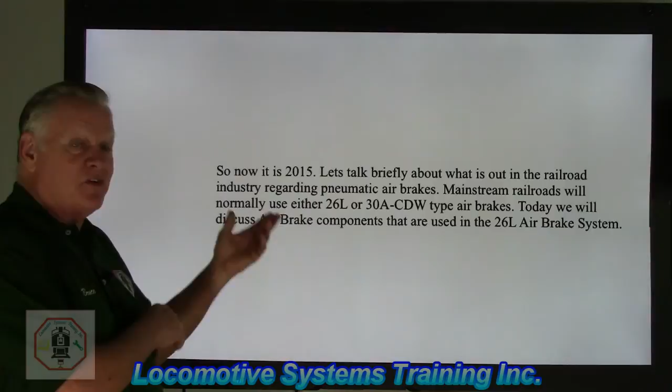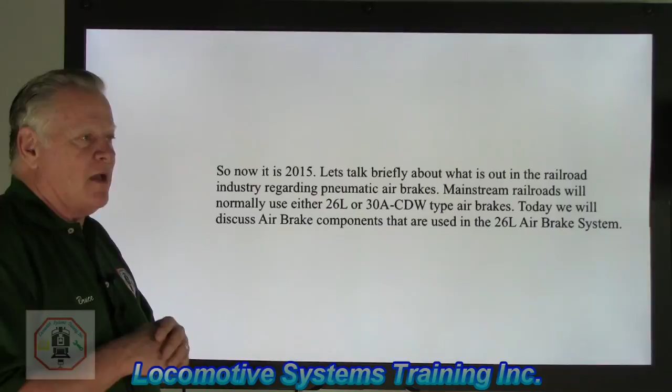Let's talk briefly about what is out in the railroad industry regarding pneumatic air brakes. From now on, we're just going to talk about pneumatic air brakes or air brakes. Mainstream railroads will normally use either 26L or 30A CDW type air brake systems. Those two systems are very, very similar. They pretty much operate the same except for a couple of pieces, which we'll probably get into a little bit later. Today we will discuss air brake components that are used in the 26L air brake system.

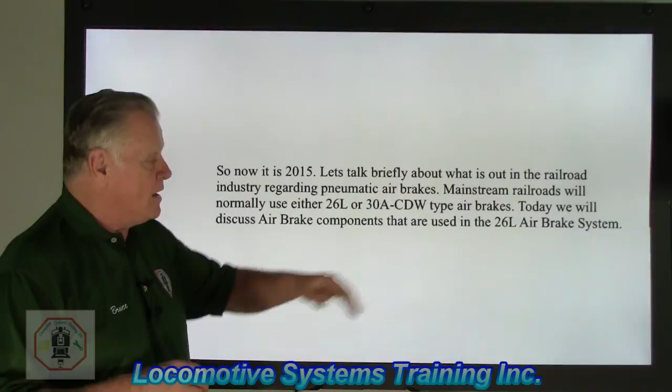Okay, so now we're going to talk about the 26C automatic brake valve. I'm the engineer and I'm sitting in the seat right here and I'm looking forward. I'm driving down the tracks. I got a 3-unit consist and 150 cars behind me. So I know, because I've driven this route before, that down the road there is Dead Man's Curve. So I got to slow down to go around Dead Man's Curve safely.

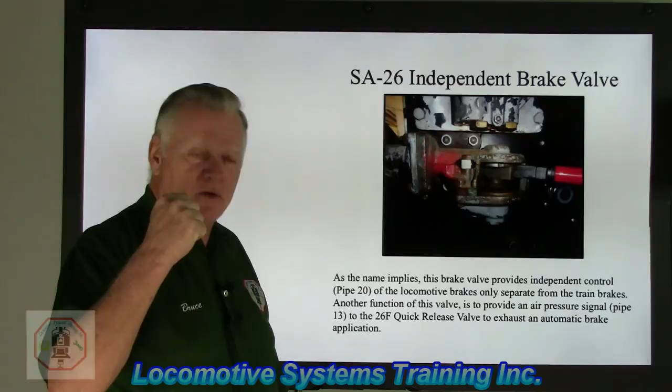Let's go back to the independent brake valve for just a second. Let's say I apply this from release all the way to full application. I'm pressurizing pipe 20. I'm going to fill the maximum of 45 psi, pounds per square inch. With that fully applied, now go back to the J relay valve.

It'll send an air signal, pipe 20, down to this valve. Main reservoir is located at the top of this valve. By the way, main reservoir is the granddaddy of all the air in the air brake system. It pumps in at 130 to 140 psi, the largest or highest pressure in the system. But pipe 20 is only 45 pounds.

So this input signal says: this guy wants full independent application. I'm going to put in an input of 45 on the upper diaphragm, 45 on the lower. I'm getting a little ahead of you here, but bear with me. 45 here, 45 here, output going out to the brake cylinder is going to be a total of 72 pounds. It's based on the percentage of the diaphragms in here.

And if you have questions, give me a call or send me an email and we'll give it more detail. Anyway, a non-multiplying J relay valve, if I put 45 pounds in, how much air am I going to get out to the brake cylinders?

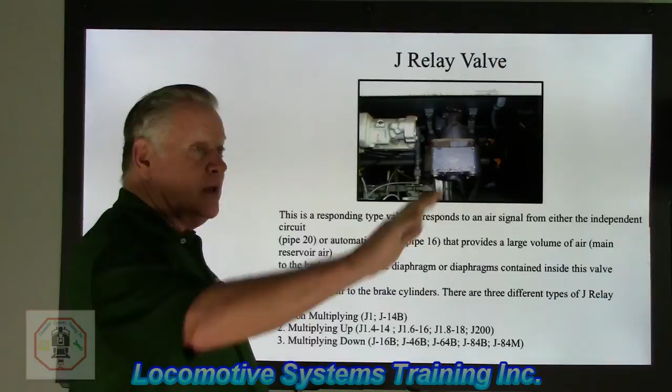Yep, 45 pounds. If I have a multiplying up valve like the J1.4-14, J1.6-16, J1.8-18, or a J200, any of those four, I would have had a 45 pound pressure. That pressure goes in, and the output is greater than the input. That's called a multiplying up valve.

Multiplying down valve: J16B, J46B, J64B, J84B, or J84M. You'll find this mostly on older locomotives retrofitted from cast iron brake shoes to low friction or high friction composition brake shoes. Because those shoes are so effective at braking, they actually had to knock the pressures down, otherwise they'd lock up the wheels. So the signal would go in at 45, and the output pressure would be something less than that. So: not multiplying, 45 in, 45 out. Multiplying up, 45 in, pressure greater. Multiplying down, 45 in, pressure less than 45 output.

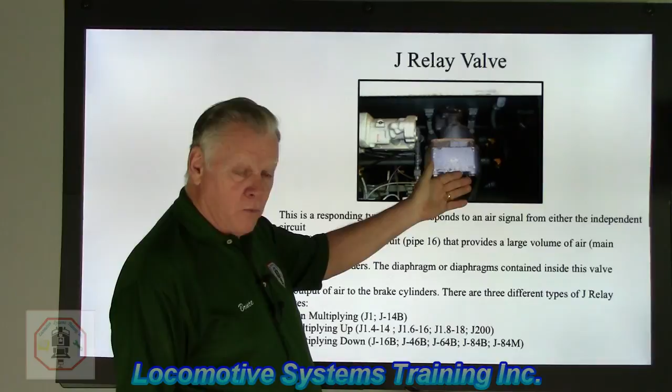There's a whole bunch of J relay valves. All this guy does is act as a responding valve, taking the signal from pipe 20 in the independent circuit or pipe 16 in the automatic circuit, and sending an output signal over to the brake cylinders. A lot of people think when you move that handle, in either the automatic brake or the independent brake, air actually goes down and fills the cylinders with air. That is not true. All that signal does is go from the automatic or independent valve to this guy, through a couple of check valves and other little things. And this guy, based on what handle I moved and what circuit I'm in, will send the output to the brake cylinder.

Let's go to the next one. I need to go back all the way to the automatic brake valve. The 26C automatic brake valve is an initiating valve.

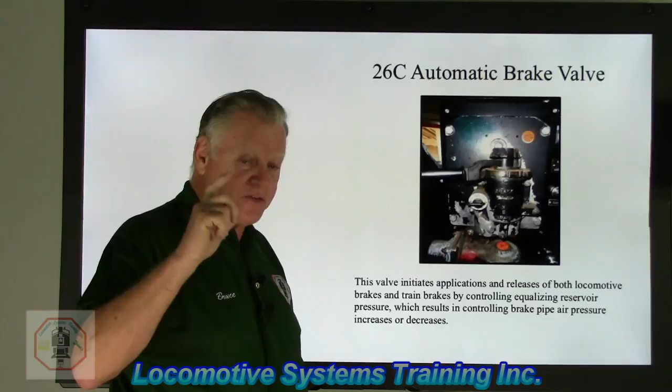We've already discussed that when I take the automatic brake valve and move the handle into the service zone, I'm reducing equalizing reservoir pressure and brake pipe pressure. I want to create a pipe 16 signal pressure. Now let's go back to where we were. That reduction in brake pipe is felt inside this valve and also in this side valve. So let me explain what they are.

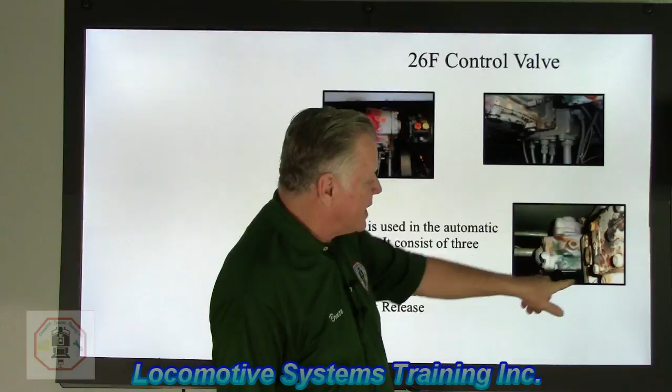This here is the 26F service portion. This right here is the pipe bracket—see all the pipes coming up and bolting to the bottom of it. And the little guy on the side here is called the 26F quick release valve. There are three components in the 26F control valve: the pipe bracket, service portion, and quick release valve.

This guy responds to that handle movement in the cab. I'm not going to go into the whole process, because then you're talking intermediate air brakes, and that's a whole different level. This guy converts that reduction of brake pipe inside here into a pipe 16 signal that goes over to the J relay valve. A full service rate reduction here will be a reduction of brake pipe from 90 down to about 65, so now I've got 65 pounds of brake pipe inside this valve.

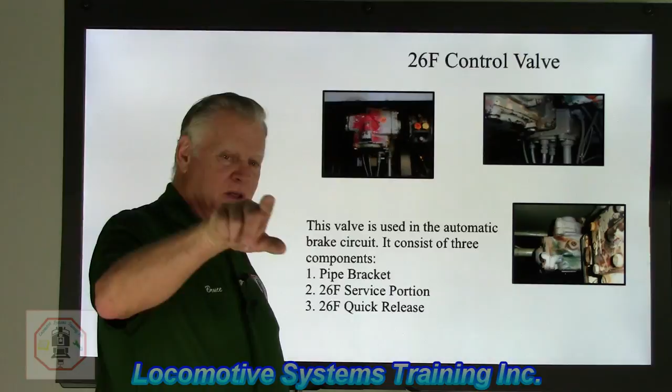That valve is going to produce a signal 2.5 times that reduction. In other words, when brake pipe reduces, this guy senses the reduction and says, okay, if I made a 10-pound reduction, I need 10 plus 10 plus 5 — that's 2.5, old school math, right? Then I'm going to build a pipe 16 signal and send it down here, and it's going to come over and go to the J relay valve. So if I made a 10-pound reduction, that's 10 plus 10 plus 5 — I'm going to send a 25-pound signal in pipe 16 to the J relay valve. And the J relay valve is going to spit out 25 pounds of brake cylinder pressure.

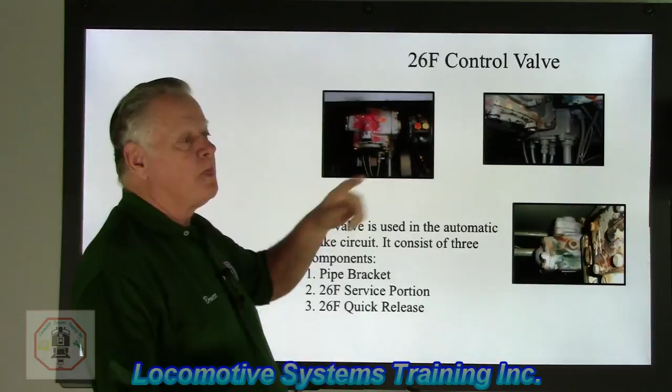Hopefully you got that, but if you have questions, send me an email or give me a call. Anyway, this is what the control valve is. This guy controls the brakes on each locomotive. Every locomotive has one of these control valves, and every car has its own type of control valve, and they all run off the signal of brake pipe either increasing or decreasing.